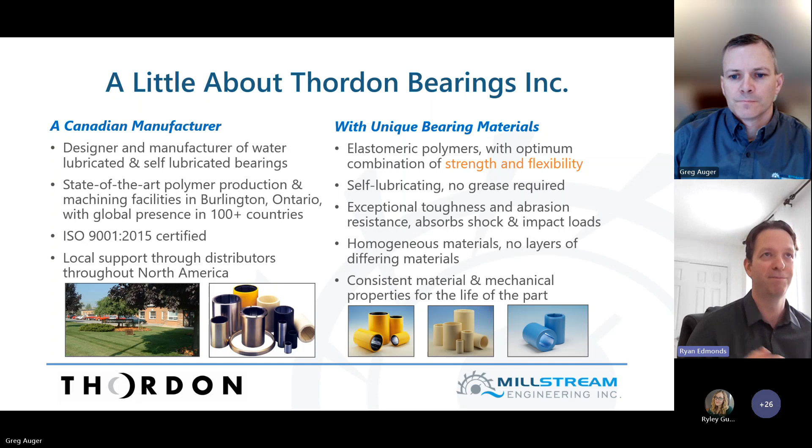We can go on from there, Greg, unless there's something you want to add, of course. You're muted, Greg. Was this my first time or something? Yeah, first time. Sorry, first time.

Anyway, so Millstream Engineering, we're the authorized reps for Thordon Bearings in Ontario and Western Canada. Anybody that might have seen me in my previous career life, I was working as an employee at Thordon. Then about 3 years ago, we split off and set up Millstream Engineering as an independent company. Our focus is still very much centered around Thordon Bearings for hydropower and industrial customers. We do a lot of bearing and sealing related troubleshooting and trying to come up with solutions for people. We also represent a couple of other product lines: a line of industrial valves called Pair Valves, and we work with a bronze foundry called NEA Foundries for different bronze components. But the topic today is all about Thordon and shaft seals and guide bearings, so with that, I think we'll just get into it.

Greg, you've muted yourself again somehow. It is his first time, Super obviously. Yeah. Super strange. Yeah, sorry.

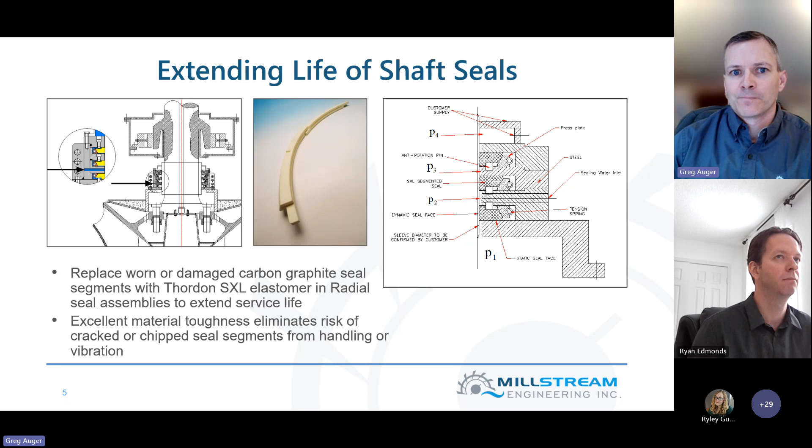That also comes into play in terms of abrasive resistance when the water supply to the seal is not as clean as we might like it to be. So that brings us to this slide, showing some abrasive wear testing of different types of materials against a rotating shaft with an abrasive slurry material, measuring how much material is lost over a fixed period of time, and then comparing different materials.

The main materials that we see as seal faces that we would replace in radial seals would really be the carbon graphite or different types of phenolic laminates, which are a fabric and resin composite. There's all different brands of phenolic laminates, and then the Thordon SXL, as you can see, has a much higher resistance to abrasive wearing in this application.

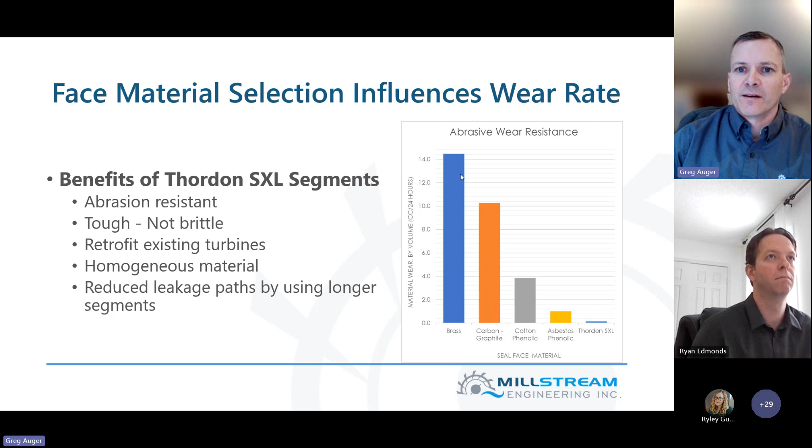Some common sealing problems that we see come up quite often when we're talking to customers about radial shaft seals: for one, high leakage rates. If you have lots of water coming out of your shaft seal, that can cause problems if you can't get the water away quickly enough. Depending on the turbine, sometimes that's just going straight to a gravity drain, but other times it's going into a sump, which has to then be pumped out. If you can't pump it out as fast as it's coming in, the water level starts to get higher and higher, and eventually that can cause flooding on the head cover.

It can cause backing up into an oil bearing. If you have an oil and babbitt bearing above the shaft seal, depending on the design—Kaplan's and Francis, new and old turbines—they're all different geometries that we have to consider. But you can definitely have a case where your leaky shaft seal is now causing your oil and babbitt bearing to be full of water, and then you end up with a wiped babbitt guide bearing, which is kind of the worst case scenario, but it's really the problem of the shaft seal leaking too much.

You also can have the problem where if you have too much leakage on the head cover and you have greased wicket gate bearings, you're also washing all that grease into your sump, and now you're pumping greasy water into the river. So you have to have an oil water separator, some mechanism of separating the grease from all that leakage water. So if you can reduce the total leakage, that helps all of those problems. Trying to get leakage down to a manageable level is always one of our objectives.

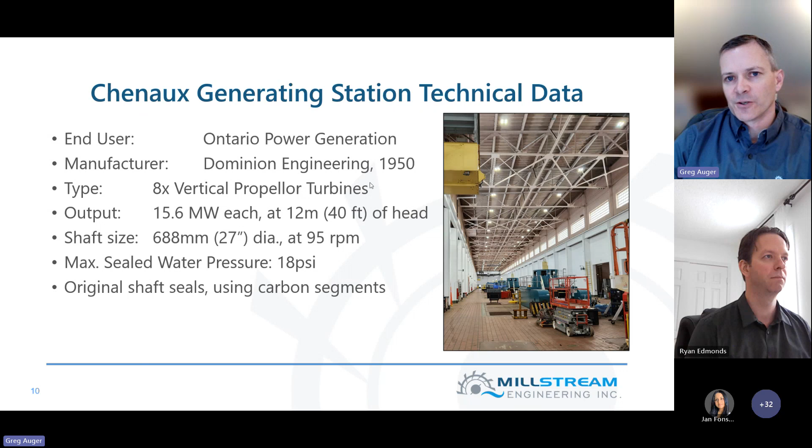And the original shaft seals were using carbon segments for quite a few years. But as we got talking with them about trying to improve the wear life and also get the leakage reduced a little bit, we ended up supplying the first set of Thordon seals in early last year, summertime last year, I guess.

So this one, we did a couple of things. We used the Thordon SXL elastomer to make the seal segments in the same shape and size as the carbon graphite components, so we could directly retrofit them into the existing housing.

One of the challenges here, and one of the reasons they wanted to get longer life out of the segments, you can see that nice small dark hole there is where somebody has to crawl down to replace those seal segments. So the longer we can get between replacements, obviously the nicer that is for the maintenance staff at the plant.

We also, in this case, supplied small water filtration skids to get a cleaner water supply to the seals. The original setup was just taking water from the main cooling water header, which had a pretty coarse level of filtration. So we took that water and put it through a cyclone separator supplied by Thordon - this is the Thordon water quality package. That's bringing our filtration level down to less than 100 micron particle size. It also ties in a flow alarm, so we know that we're always getting a minimum flow and pressure required to the shaft seal.

So we did the first unit in the summertime. We did the second one late last year, and we've just now, earlier in 2024, supplied the seals and water filtrations for working on changing the other 6 units at the station. So through the rest of this year, we should see all of those turbines switched over to the Thordon material.

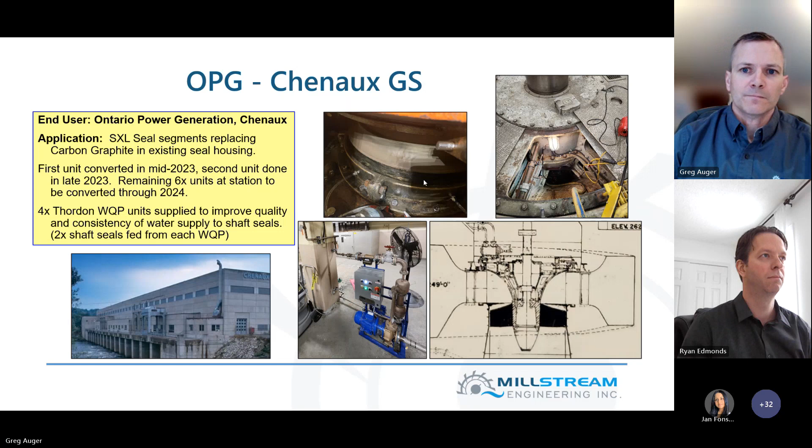This one's a little bit smaller. We'll move out to the west coast. This is with Innergex in BC, at the Walden North generating station. At this site, they have 6 horizontal Francis turbines, about 3 megawatts each, significantly higher head here - we've got 42 meters of head, and it's at 295 millimeter shaft size.

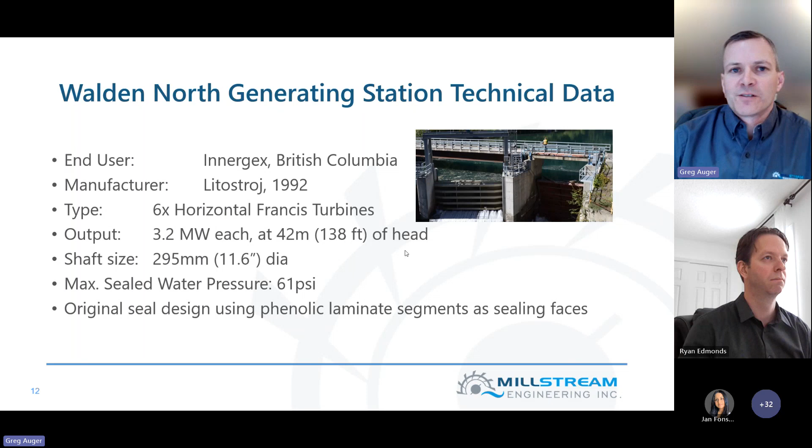So quite a bit smaller shaft, but still using the same idea with the segmented seal. We have about 60 PSI under the seal in this location. And the original design here was using the phenolic laminate segments as the sealing faces.

So the pictures here, you can see on the right, that's the previous phenolic laminate segments. And so we supplied a set of Thordon SXL segments along with new compression springs, new garter springs. We supplied them into the first turbine at that station in 2021, which has been running quite well since then. You can see the drawing here - I've turned it on its side because it's a horizontal unit, but there's where the seal segments are, and then compression springs and garter springs.

And so we're just in the process now of supplying segments and springs for the other 5 units at the station. So those should all be retrofitted as well in the next 12 to 16 months or so, depending on how much they dive into all of their units. But they're going to work on upgrading all of them over the coming year.

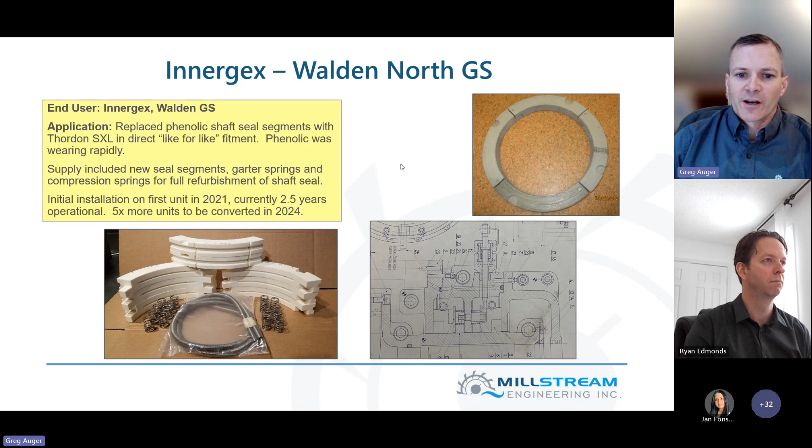What's next? So the next one, back to Ontario. This is with Peterborough Utilities, at the London Street station. This one is a Voith turbine - S-type Kaplans, about 3 megawatts each. So we actually have 2 seals on this shaft, an upstream and a downstream seal. One's on a 350 millimeter shaft, one's on a 500 millimeter shaft.

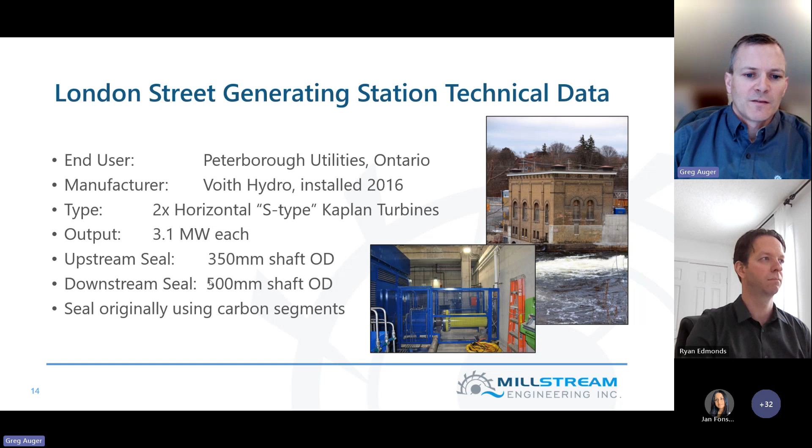These were also originally using carbon segments, so we supplied Thordon SXL for this station last year. In this case, the motivation really was they pretty urgently needed replacements. They were working on an outage, realized that they needed to replace the carbon segments and didn't have sufficient parts in stock as spares. So we got the call - hey, can you make something that would be able to retrofit this quickly?

And so we luckily were able to get raw material from the factory in Burlington, get it to this machine shop straight away, quickly design and model up the shape to replace the carbon pieces. And we were able to deliver those new segments to the customer within 2 weeks, which we felt was a pretty good accomplishment, especially in the month leading up to Christmas when everything kind of gets a little hairy trying to get things done by the end of the year.

So we supplied that for the first units at the end of last year, and then we supplied some more spares in the beginning of this year. As far as I know, everything there is also running well.

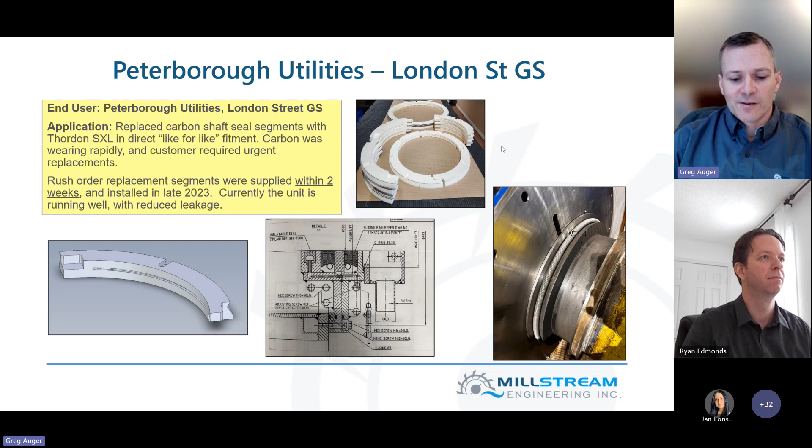You might note on the first Chinook one as well, we also supplied that in 2 weeks on an emergency basis, also to start that process of doing all the units in that station.

Yeah, that's true. And that's one of the big advantages for us with Thordon having the factory right in Ontario is the raw material, the Thordon SXL, is made basically every week. It's produced in the factory, and so we can get the starting material from the factory very quickly. Then it's just a matter of scheduling with the machine shop. Depending on other work that's going on, we try to find a machine shop, one of the partner shops we work with, and get the work done as quickly as we can when we have those rush orders coming through.

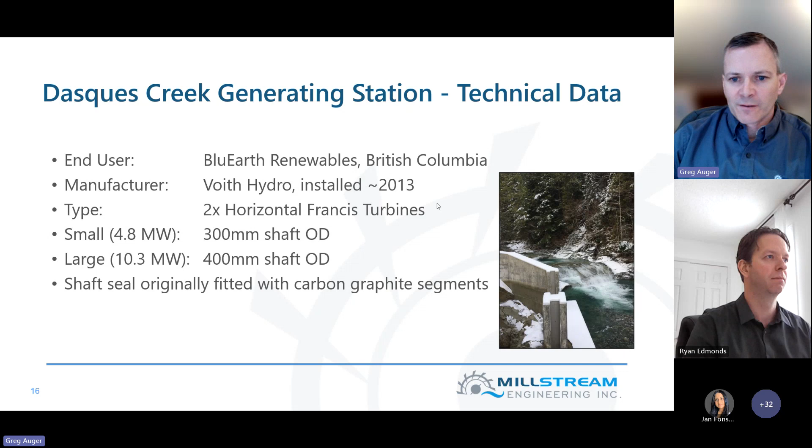So this one, I'll jump back to the West Coast again, and then I'll hand it to Ryan for a couple examples. This one is Dasques Creek, with BluEarth Renewables, also a Voith turbine originally, horizontal unit. Same thing, originally fitted with carbon segments - these were the carbon pieces. This also was a rush order that we just shipped in early March. These ones literally left the shop last week and should be installed quite soon.

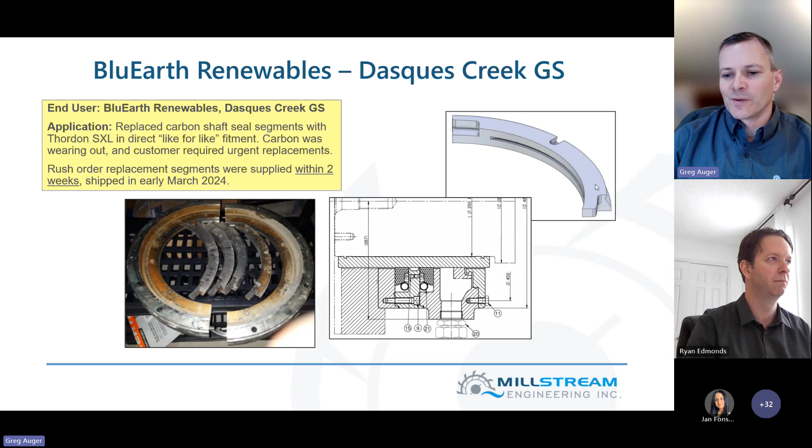So I will hand it to Ryan to talk about a couple more big ones, and then we'll move on to turbine guide bearings.

Oh, Ryan, now you're muted. Oh, my first time too. Sorry.

So this is the Manic 5 generating station, which is one of Hydro-Quebec's larger stations and probably one of the prettiest stations as well, if you ever get a chance to look at it. Looks very nice. There are 8 units in this facility, so there are 260 megawatts. There's 2 power stations on site here as well.

So these were carbon graphite seals when they originally started. This is a picture - I guess in the center there, you can see the original carbon segments. Thordon was able to model our segments to replace them.

But one of the other things that we can do with the Thordon material that I don't think Greg's touched on yet is because of the fragility of the carbon graphite, which is very similar to pencil lead. So if you want to do a home example for yourself, sharpen a pencil for a very long time and then see how easy the material will break off. But because of that fragility, there's things we can add to our seal segments, like a radial groove on the inside diameter that allows water to the center of the seal segment that provides a hydrodynamic lift of the segment to help it last a long time.

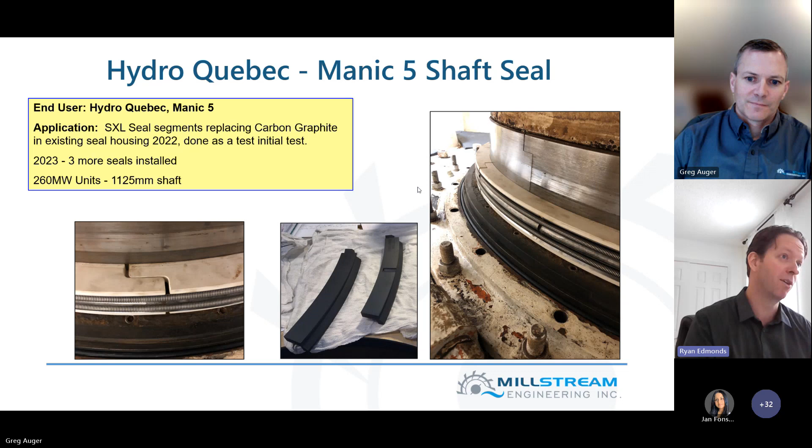But again, it's a success, and it goes in line with what we've seen with every seal installation we've ever done - the fact that it works better, it's easier to install, and it leaks less, and they find out it lasts many, many times longer. And then we do the rest of the station.

I think we went the wrong way. The next one we're going to talk about is Limestone Generating Station. This is Manitoba Hydro's largest station. It's relatively new by Canadian standards, I would say - from the 90s - and there are 134 megawatt units in the station.

So they're 91 feet of head. The shaft diameter is 1,250 millimeters, or 49 inches. These are propeller units, and they're only sealing about 30 psi.

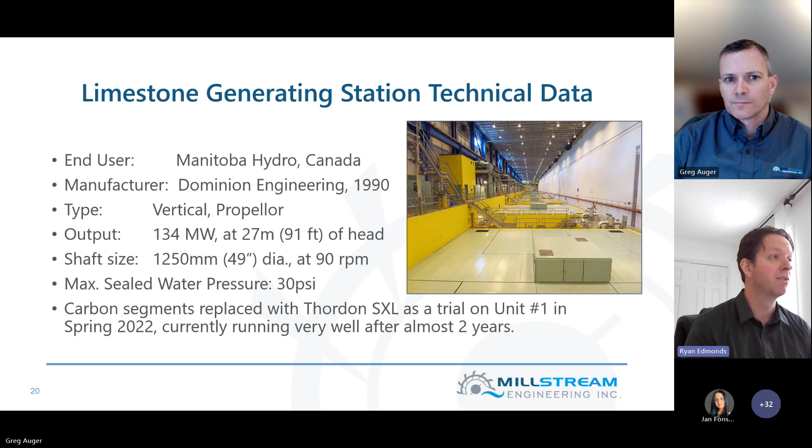So we did carbon segment replacement on unit 1, the first unit, in 2022, I want to say. What they were experiencing in this station - and this is why I say, when we did that poll at the beginning, when people say frequently or not so frequently - this is one of those examples I often reference. Because when we talked to these people originally, it was like, no, there's no seal problem, we just change them every year. And to us, that's kind of a problem.

You shouldn't be changing them that frequently. And that's why I always like to make that comparison or make that comment that defines what's good and what's bad.

So this one was installed, and Greg and I actually went to site for the installation there. You can see the picture on the right. It's a confined space, so we stuck a camera down in a hole we weren't allowed to go into because we were not qualified in that state.

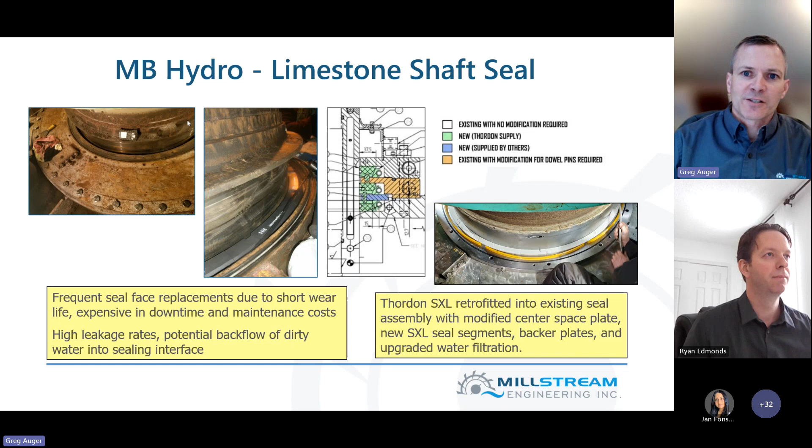So we're going to move on to the second section here of the presentation, which is focused on turbine guide bearings. Same idea—we'll go through a bit of technical content, then go through some examples of installations, and then we'll have time for questions at the end on both topics.

So the general idea here, as with the shaft seals, is that we're trying to improve the performance and wear life of water lubricated turbine guide bearings. Just again, a refresher on what a turbine guide bearing does for anybody who's a little rusty.

So the idea is that the turbine guide bearing, being the bottom bearing or the main guide bearing, or in a horizontal unit the one closest to the runner, is the bearing that holds everything steady. Usually you'll have other bearings supporting the generator. You've got a thrust bearing often, which in a vertical unit holds the whole weight of the machine. Those are 99% of the time oil and Babbitt bearings.

But the turbine guide bearing, next to the runner, in some cases will be oil and Babbitt, but in other cases will be water lubricated. And of course, as suppliers of water lubricated bearings, that's our specialty, and that's what we're focusing on today. From a bearing or bushing design point of view, we would consider this a high-speed, low-load application.

Your shaft is rotating continuously at a relatively high speed, but you don't have huge high loads compared to something like a wicket gate bushing, for example, which would be very low speed but a much higher radial load on the bearings. So when we have a high-speed shaft like this, we have to provide cooling for the bearing so that heat isn't causing damage to the bearing.

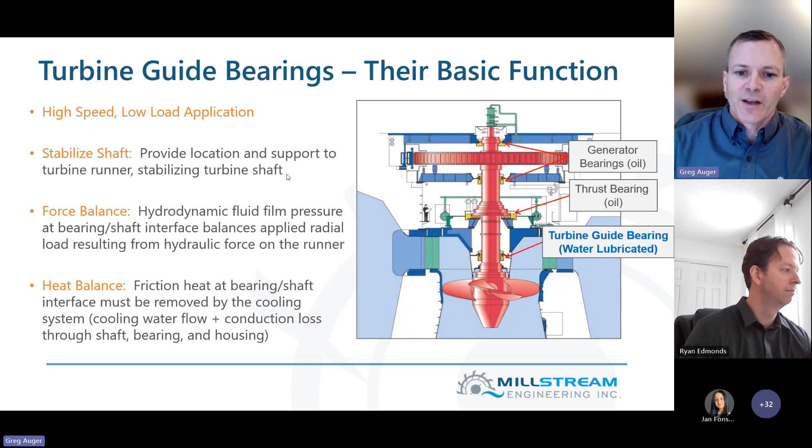One of the things we've both talked about before, and presented on in the past, is the evolution of water lubricated bearings. The earliest ones, people that are familiar with wood bearings, used strips of wood that were typically put into the housing as staves. That was the way to make a water lubricated bearing before there were any other material advancements. The wooden staves were fitted between wedge blocks, or different ways to secure them into that housing.

As we started using modern polymer and composite materials for bearings, we gained the ability to make them as full half-shell bearings, or split bearings, which means we can get a lot more load carrying area in the bearing. We don't have to have these big gaps between the staves, and having more bearing area increases the load capacity. It also helps increase the water film effect, building up the water film thickness.

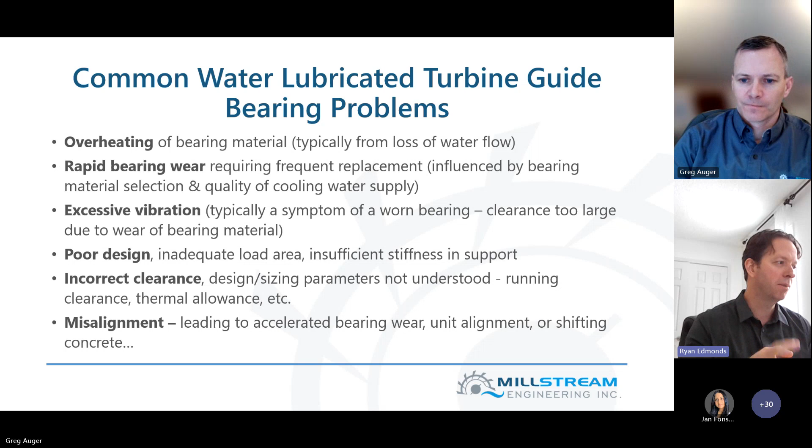Because when he was talking about the hydrodynamic film, the large gaps between bearing segments can mean inefficient hydrodynamic film, which can cause orbiting essentially within the shaft, which gets picked up as vibration. So if you get bearing wear and your shaft was not efficient hydrodynamically, you can get an orbiting effect of the shaft within the bearing clearance, and the bigger that clearance gets, the bigger it appears as vibration. So if you're fully hydrodynamic, some of those problems just disappear very quickly.

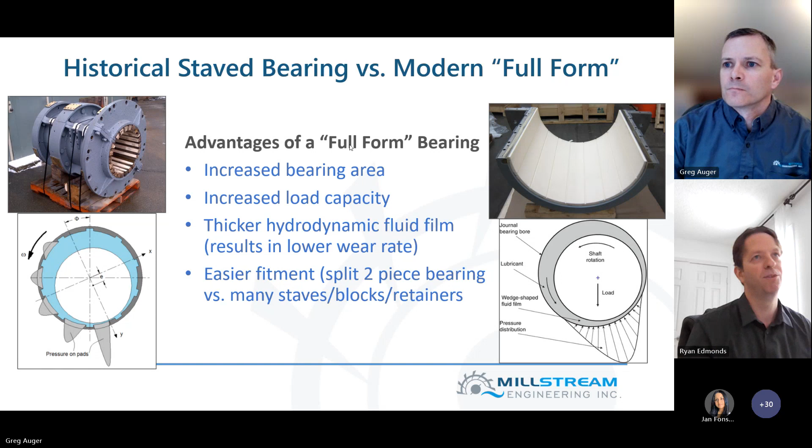That was pretty much all I had. All right, that's great. Thanks, Ryan.

So I want to make sure we don't run ourselves out of time, but we're going to do another poll question here quickly, and then we'll get into the examples. So how long should a water lubricated turbine bearing last between replacements? Is it 1 year? Is it 5 years? Is it 10 years? Or is it 20 plus years? Or the favorite answer that's not shown on the poll, it depends. We didn't give you that choice though.

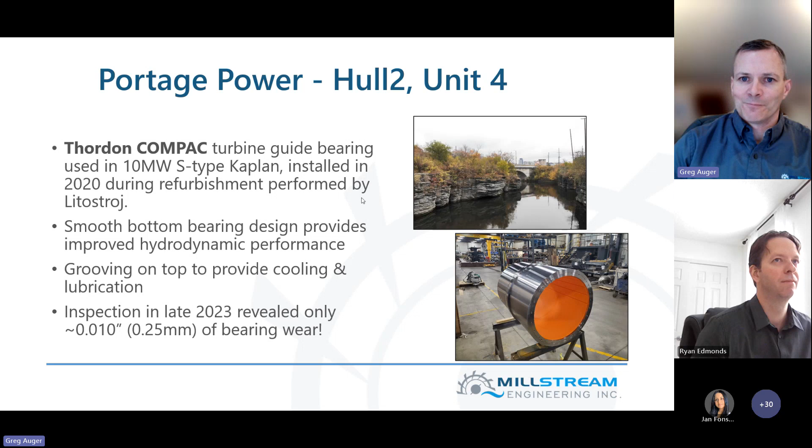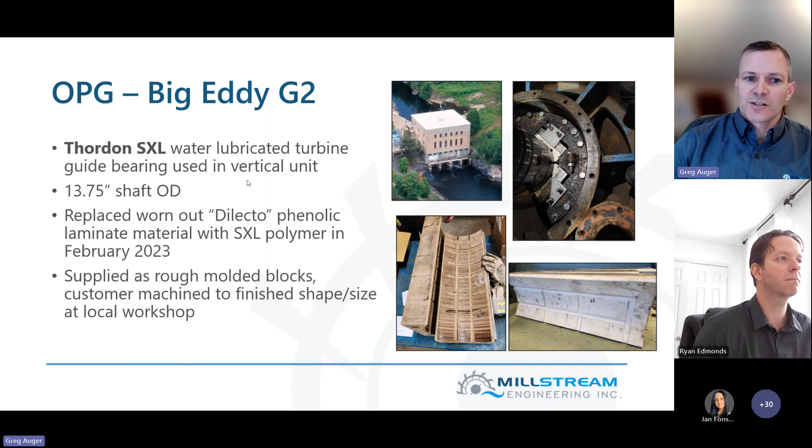This is a picture - I'll just add, I saw the customer this week, and the clearances they told me are the exact same as when it went in 18 years ago. So that's too good - that's a great endorsement.

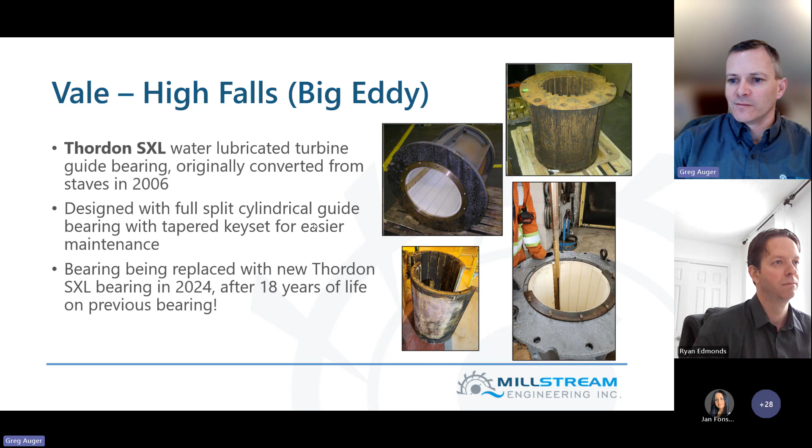This is just showing the new bearing with the bronze key set. This is the bronze wedge key that drives down and secures those two split halves into that housing, which I think we've talked about in probably many previous presentations.

So I'll flip it over to Ryan to talk about two more examples, and then we should be wrapping up. Yeah, I'll try and be quick here.

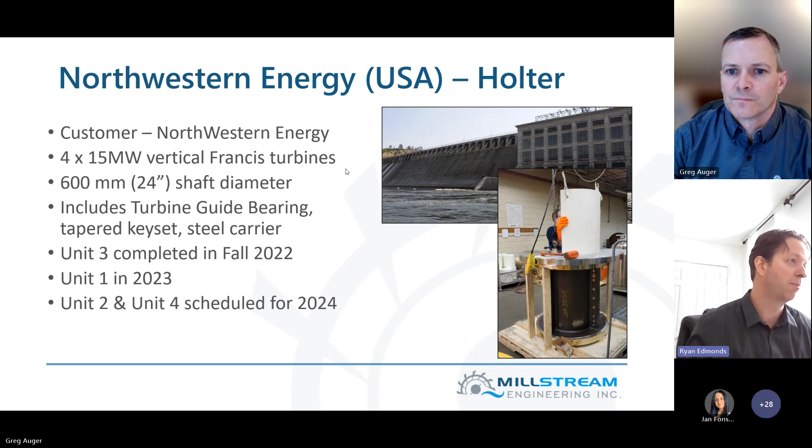So then we did the next unit last year, and the remaining 2 units are going to ship in a couple months here as well to get that station complete. But that's just an upgrade from Generation 1 water bearing to Generation 2.

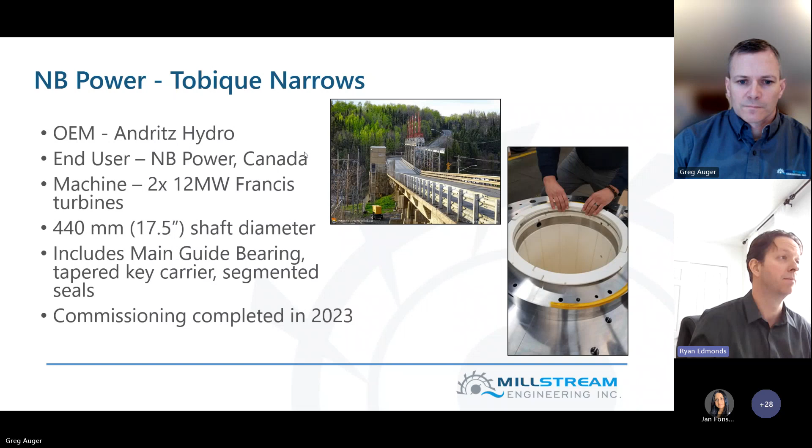So we can go on from that, I think, Greg, unless you have any comments.

Yeah, so basically just to wrap up, I hope most of that information was interesting and useful for everybody. Generally, both Ryan and myself have looked at a lot of different guide bearings, shaft seals, and wicket gate applications. So if you have challenges and want to try to improve the life and performance, don't hesitate to ask us to take a look. We're very accustomed to looking at old, messy drawings, trying to decipher what's in those original drawings, and then giving ideas and feedback on what might be possible for improving or upgrading the equipment. There's certainly no cost to you to get a second opinion, so absolutely take advantage of that and ask us for input on anything you're working on. We're happy to take a look.

So with that, we'll move to questions. And I think we have one now, and I'll say it and maybe I can even answer it: what is the ideal clearance for hydrodynamic action?

I think those are not the same thing at all, because clearance and hydrodynamic operation are essentially unrelated. Hydrodynamic operation is basically about load within the bearing and the lubricating medium. So we're making load adequate to make water operate hydrodynamically. The clearance could be almost essentially zero, it could be like 1 or 2 millimeters, or it could be a foot, and you could still achieve hydrodynamic operation if loading and everything is correct. So it's unrelated, essentially.